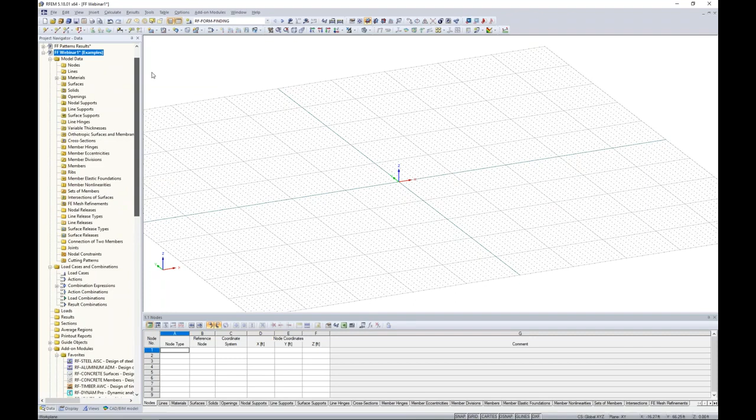Now, our results will also be available to us within the Project Navigator, which we'll get into a little bit later on. The fourth tab down here may be new to some of us. So by enabling that CAD/BIM model option, we now have this fourth tab to import in an IFC or a STEP file. So I can just simply click on one of these buttons and I have available to me my IFC file for my office building.

So with a few steps, we can see here that the IFC file is imported into our main program, RFEM. Now, I want to be clear that these are still just components. They're not actual elements within RFEM, meaning they're not surfaces, members, they're not solids. We would need to convert those to elements in RFEM. So right now, this is just serving architectural purposes.

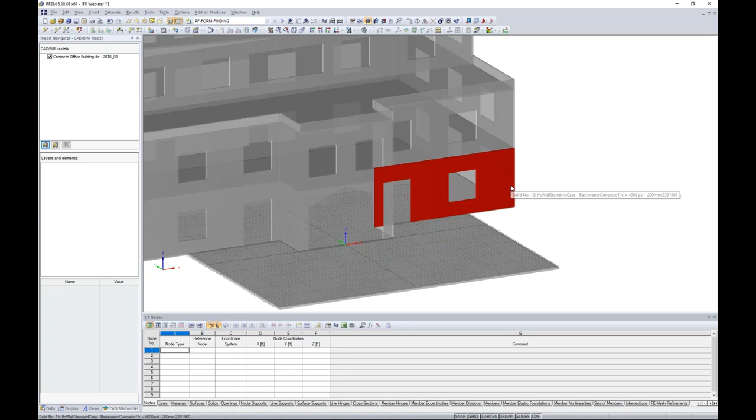And in particular today for this concrete office building, I'm trying to design a canopy on the front face of this building, but I want to make sure that it lines up perfectly with the front face of this office building. So that's the whole purpose of importing in this IFC file. We're not going to be designing the building today.

So what I can do is to take one of these elements, and in particular, we'll start here with our front slab. I can right-click to create a surface. Now, the program generates some arbitrary thickness and selects some material within the model. This really doesn't matter. We're actually going to end up deleting this slab. We're purely using the nodes and lines for geometric purposes to generate our canopy structure. So I can just click OK.

So once I've done this, I can actually hide my IFC file, and all I'm left with is this shell element that I converted from that file into RFEM. So what we'll do here is to turn this into wireframe view with my view options up at the top. And I'll take this line element on the left side of my slab. I'll right-click to divide the line by a certain distance.

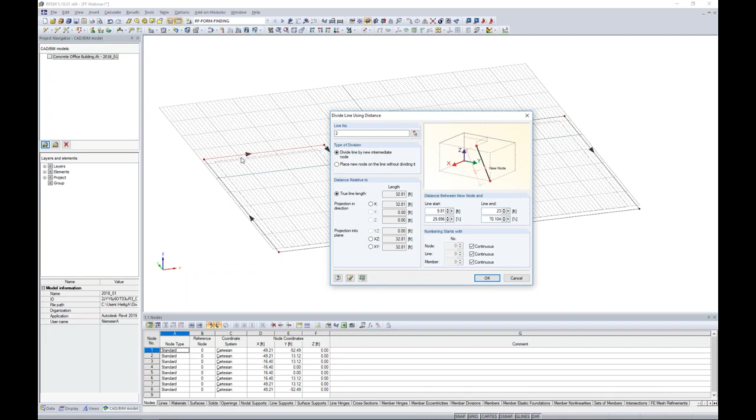So here is where I can select 23 feet from the line end, and I can see with my black arrow here what's the line start and what's the line end. I click OK. So all I've done is generated an additional node here right along this line length.

Now I can hold down my control key to select that new node in addition to this node here. I continue to hold down my control key and I take advantage of what's called our drag and drop. This allows me to make quick copies within the model without using that move/copy tool. I want to additionally use this connect lines or members tool up here at the top. So I select this, and what this allows me to do is to highlight over that node, and it simply broke that line apart in two.

So I take these newly generated nodes, holding down my control key to select them, and now I'm going to use my move/copy tool. I'm going to create one copy in the global Y direction, which I can see with my global coordinates here, of -30 feet, and I click OK. So here are these new nodes generated at a distance of 30 feet in the global Y direction.

Now I need to add in a node right here at my origin. So there's several different ways to do that. Up here in our quick tools, we have the option to draw a new node, which I could just easily snap to the drawing grid here at the origin. We also have this feature that's called node between 2 points. So when I select this option, I can click on the node on the left, the node on the right, and the program automatically suggests that I'd like to place a node right at the midpoint.

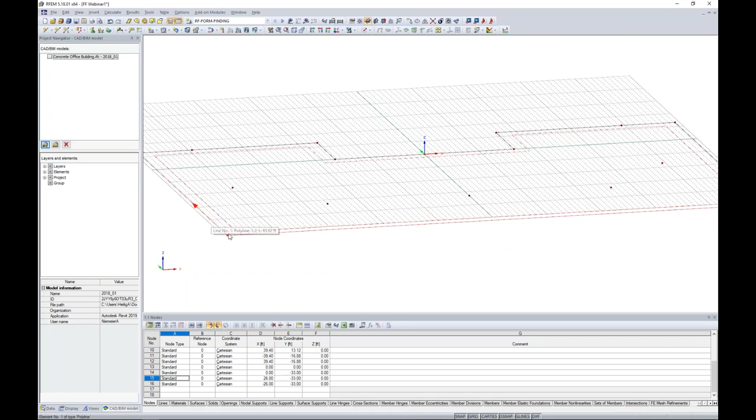Now that we are done with the basic nodes at the bottom of our canopy structure, I'm done with this surface, so I select it and hit delete on my keyboard. We can clean up the model by deleting all of these line elements we don't need, simply clicking on them and hitting delete, and we're left with only our nodes at the bottom here.

The next thing to do is to generate our columns. These won't be columns yet, just lines, placeholders which we'll later assign a cross-section and material to. To do this, I select the nodes I'm interested in, holding down my control key to select various nodes, then use my Move Copy tool.

We create one copy in the global Z direction, the vertical direction, of 23 feet. Before I hit OK, I go into this Edit Expanded Settings, which allows me to create lines between my copied nodes, saving us an extra step rather than drawing those lines manually. Once I click OK, those line elements that will eventually be our columns are drawn here.

Now, in the rear of my canopy, this is where it will be framing directly into the office front face, so I don't need to draw columns back here. Rather, we're going to attach at the top of the canopy directly to the office building. So I highlight these line elements and my bottom node and delete them all together, and I'm just left with these nodes up top.

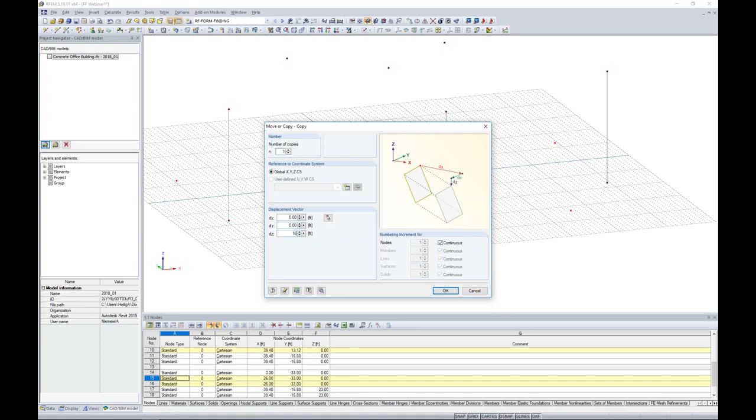Now, in a similar fashion, I want to select the individual nodes left down here at the bottom, use my Move Copy tool once again, this time only a distance of 16 feet. We leave this setting here to create lines between nodes. I click OK, and here are my additional columns.

Again back here, we're framing directly into the office building, so I don't need these columns back here, just these nodal points at the top. Just like that, we have finished with the basic geometry here from that initial slab. So I'm going to turn off my grid down here at the bottom, and I'm only left with these node points, and I'd like to draw the outer profile of my canopy structure.

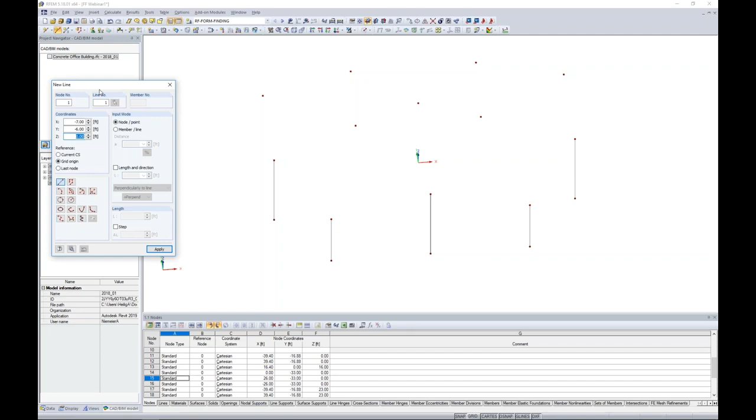I can choose a new line element here in our quick tools. Keep in mind, I still have drawn no members within the program, these are just simple lines and nodes, exactly what you would think of as in AutoCAD, just line elements only. And we choose this straight line option.

Here is where I can snap to these different nodes that I've generated, and the program is fairly good about using the O-snap settings to snap to the top of these nodes. So I continue around drawing the structure as such. We right-click to exit, and we have the outer profile shown.

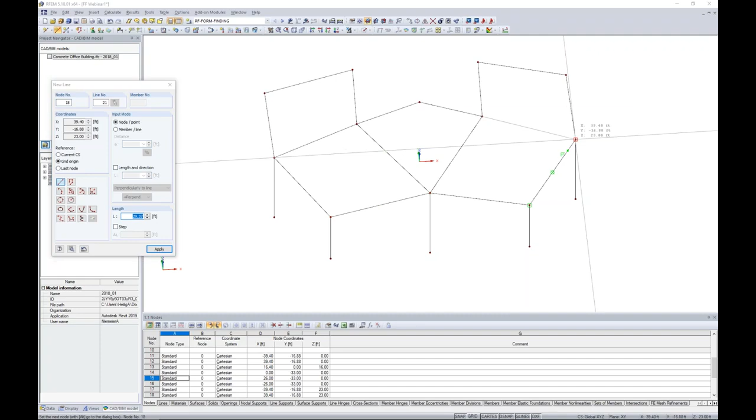Now, I do need to draw lines to define the individual cells here of my canopy, so I continue doing so by just snapping from one node point to another, and we do so on the right side of the structure. Just like that, we are finished.

If we're interested to see how these elements frame into my office building, I can always reactivate this IFC file of my office building. Remember, these are just components used for architectural purposes, so I want to make sure my canopy isn't framing over any windows or doors. So far, it looks okay.

So we turn that IFC file back off, and now we want to begin drawing our cable elements. Our cable elements are going to be placed on the boundary lines of my fabric membrane.

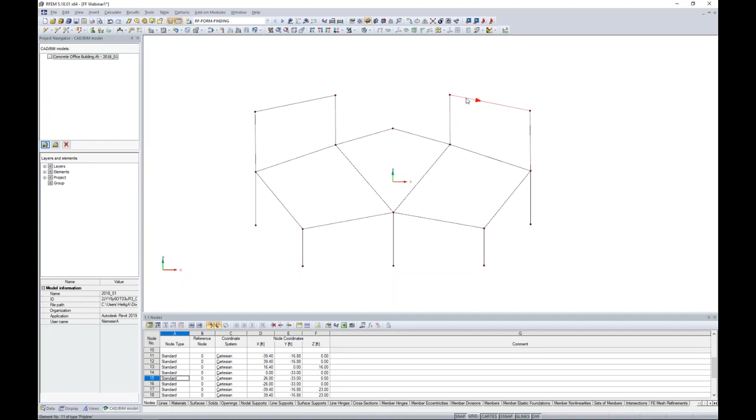This is pretty common within membrane construction. These tensile cables will take the tension forces as the fabric is stressed. So at locations where we're framing directly into the office building, these line elements will be cable elements, and we can assign cross-section properties for the cable elements to these lines directly.

But for the other line elements up at the front of the structure, we have a small issue. These will eventually be HSS steel members, but I also want to show cable elements at this exact same location. The problem is that both the steel member and the cable elements cannot share the same line, so I need to draw a small offset line to represent my cable as an arc member.

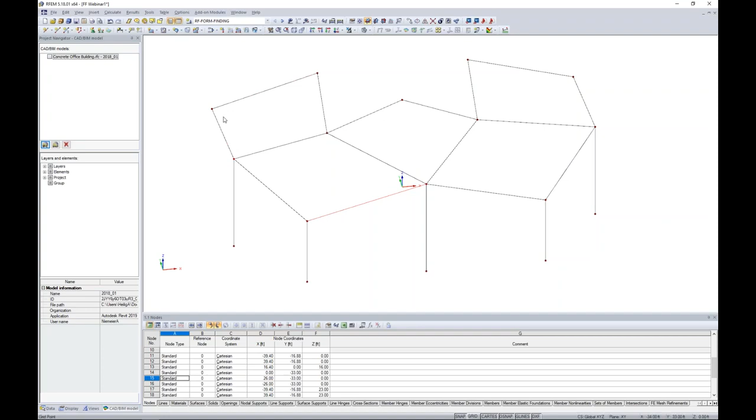How I can do this is to turn back on my grid at the bottom, and we don't want to use these global X, Y, and Z coordinates because we have some pretty odd geometries here. We have a nice feature in the program where we can define our own work plane by clicking on 3 grid points. I click this option once, then click 3 times to define my grid, and you'll notice the drawing grid is automatically placed at the incline specified by those 3 points, with a new coordinate axes of U, V, and W.

With this new coordinate system, I'll draw a new line again, but this time as an arc via 3 nodes. I simply click on the point closest to what will be my office building, then click on the column point, and there we have a simple arc element. Keep in mind the arc radius is completely arbitrary—it doesn't matter what we set this to. The program will later override this shape with the form finding process, based on the pre-stresses we put in, to find the correct catenary shape.

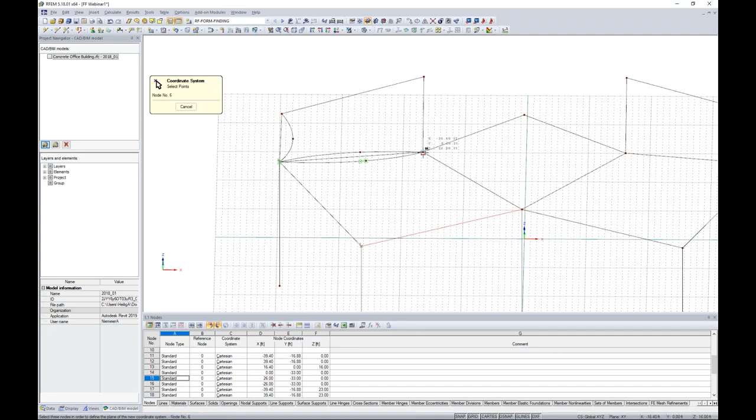I'll do the same thing at a different location for my cell points—again completely arbitrary. We move up to the second cell and change our user-defined drawing grid. I click first to reset the drawing grid, click again to define my new point, and click on 3 points here, and now we have a new drawing grid at a specified angle.

We draw a new arc here and simply snap to these points, again any arbitrary points. We need to do this one more time, so we click the option in the toolbar for a user-defined grid, click 3 new points, and now the specified angle is given. We go back to draw a new line element as an arc with 3 points and continue this process for our additional cable elements, and one more time for our 3rd cell.

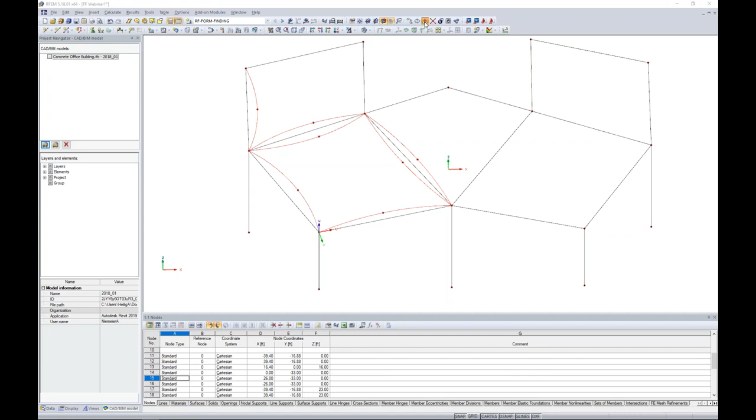Deactivating this grid at the bottom, I have these cable elements shown, and I'd like to show them on the other side. Rather than going through that entire process again with our user-defined grid, we can hold down the control key to select these cable element lines and take advantage of our mirroring tool—exactly like what it sounds like, similar to AutoCAD. We create a copy by mirroring about the global YZ plane, click any point within the model to mirror about, click OK, and we're presented with the cable elements on the other side of the structure. That saves us an immense amount of time.

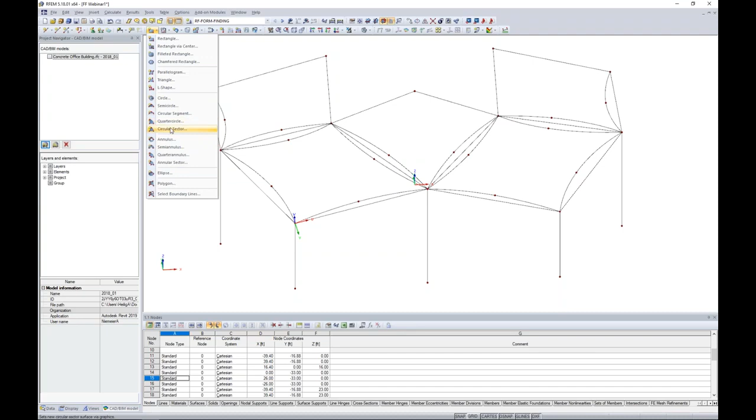Now that we've defined the boundary lines of what will be our fabric membranes, we can move on to drawing those 2D surfaces within the program. For this, I would typically suggest drawing a new surface element for a flat membrane, but you'll see that all surface elements within RFEM are only considered in a single plane. If we look at this very complex geometry, these surfaces are certainly not in one plane.

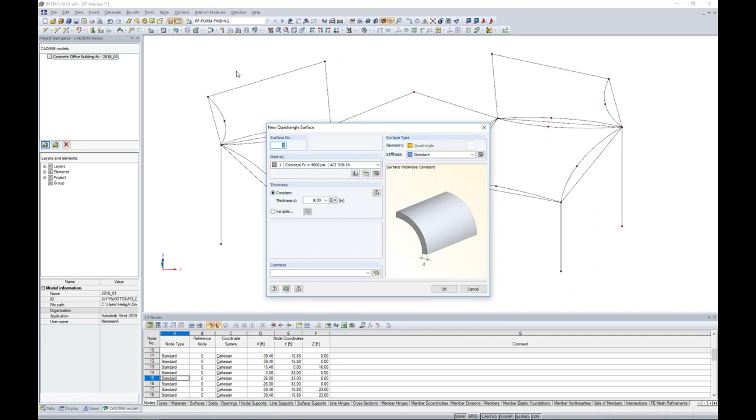So this is where we need to use the option for a quadrangle instead. We can use that from the drop-down list—quadrangle, general 4-sided surface. The stiffness will be set to membrane orthotropic.

The next thing we want to do is define what will be our membrane material. In all cases for these membranes, you're likely going to have to create a new material. We do so by creating a new material, which opens a dialog box, and we can give it a name. We'll call this one membrane.

We can even change the color. For my model, I'll go into the color palette and use green instead of blue for my fabric membranes. We change the material model here to orthotropic elastic 2D.

This information is likely something you'll get from the manufacturer, or from your own testing methods or relevant resources. For our example, we know from our manufacturer that our fabric membrane is stronger in one direction than the other. But I'm going to set this as an isotropic membrane for now, because with these complex shapes and geometry of the canopy, I don't know which way to span the strong axis of the membrane to take the high tension forces.

I'll show you later how we can easily determine that. For right now, we want to set this to an isotropic material, meaning it has the same stiffness, or modulus of elasticity, in both the X and Y directions. Keep in mind we'll come back later to adjust this.

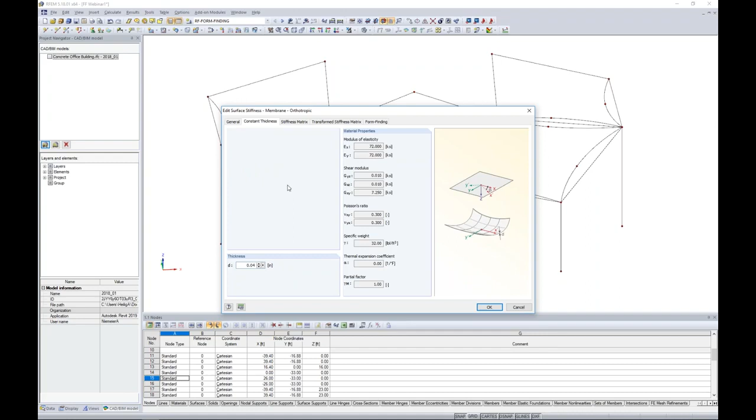What's quite powerful is that we can view the stiffness matrix of our membrane. Based on the material properties we put in, this is exactly the stiffness matrix that will be reflected in the RFEM model.

And finally, our form finding tab. This is available because we've activated the form finding module at the beginning of the presentation. We have two different calculation methods for this, either standard or projection. Standard is pretty typical for fairly flat membranes, and we'll be using that today. Projection would be used for more conical type structures.

With the standard calculation method, we can specify a pre-stress force in both the warp and weft directions. This is in the X and Y directions, and we'll choose 0.5 kips per foot. I click OK, and now we're done defining all the various settings for our membrane.

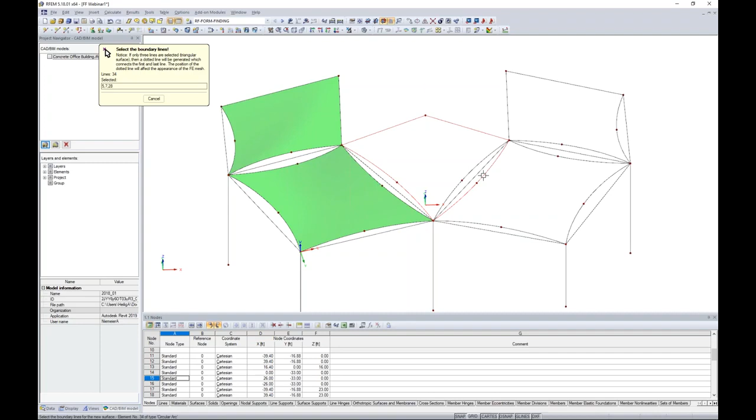We click OK, and the program asks me to define the boundary elements of my fabric membrane. As I begin to click what will eventually be these cable members, you can see that our fabric membrane is created. And lastly, on our last cell on the right, we right-click to exit out of that dialog box.

Again, if we're curious to see how this frames into our concrete building, we can activate that IFC file, and we can see that everything looks great so far. So deactivating that, we want to move on to the cable elements.

Right now, all of these cable elements are just lines. They don't have a cross-section or material defined. So what we can do is hold down our control key, select all of our membranes, and choose visibility by selected objects. When I do this, I can highlight all elements within my model.

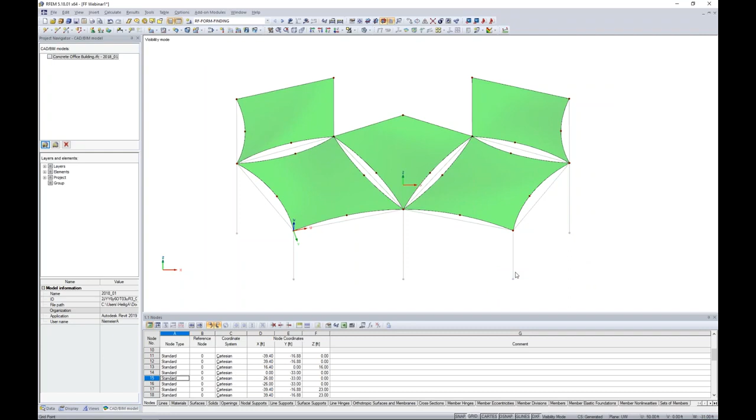You'll notice that down here, my column lines and the other various lines are not available to select. That's because I've deactivated them in my view. I only can select my membranes and their boundary lines.

So I can right-click to edit the lines, and we're brought into our line dialog box. The third tab here is called Member. This is where we can make a member available by selecting this checkbox, and here is where we can set the member type to cable.

The program's telling me I need to create a new cross-section, so I'll access my cross-section database, which you can see here we have all of our various cross-sections available within RFEM. We have several parametric sections, massive sections, thin-walled sections. We have all the rolled sections from the various standards, and in particular today, I'm going to use these solid sections.

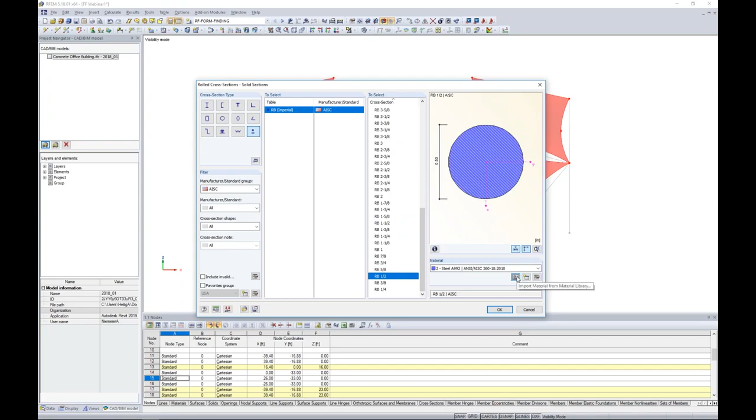So this just has some pre-populated diameters. They're basically just round bars populated from the AISC with set diameters, but you can always create your own with a parametric section. We'll choose a 1/2 inch diameter cable. The material is also set within this same dialog box. So with the cable materials, I'm going to access my material library.

Similar to the cross sections, I want to use my filters over here on the left, and I choose metal, but under my second drop down, we can choose cable. Now, typically when you first populate this, you'll only see a few materials available here from the manufacturer Pfeifer. If by chance you're using this manufacturer, then great. Your materials are already set within our database, but likely you're going to have to add your own from whatever manufacturer you're using of those particular cable elements.

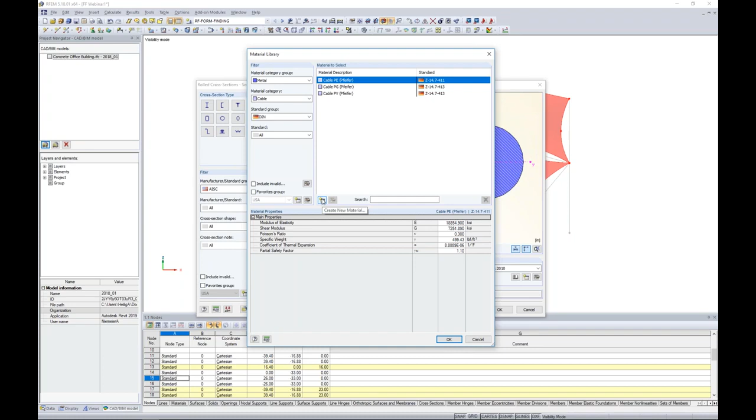So we can do so by adding our own material with this button down here, create new material. So what I went ahead and did is I created a new material, which if I back out of this, we'll be able to see it. And I called this one my ASTM cable material. Then we can put in the material properties, and you can set the applicable filters over on the left where you would like them to be available.

Once you have input these material properties and you've saved this material description, it will always be available for any future RFEM model, so you don't have to define it every time you create a new model. So once we've done this, we'll go ahead and use this ASTM cable material with my material properties shown here. I click OK. And before we click OK out of this dialog box, similar to the membrane elements, we need to set our form finding settings.

So I go ahead and click on this expanded settings dialog box, and this is where we can activate either a target cable length, a cable sag, or maybe we just apply a pre-stress force directly. This is only available with RF-FORM-FINDING activated. Essentially what this allows us to do is to model these cable elements as either straight lines, which you can see back in my RFEM model, or pretty much any arc shape like this. And everything will be overwritten based on these settings here.

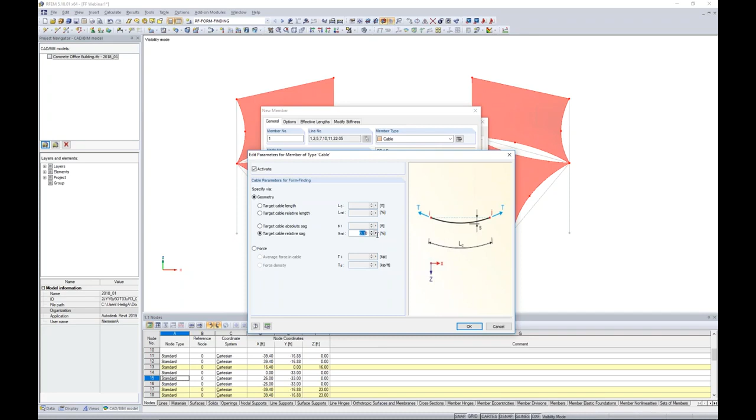So for today, I want to use a target cable sag of 10%. I click OK through all of these dialog boxes. And now, I know it's a little bit difficult to see, but we do have cable elements set for the boundaries of our fabric membranes. So I cancel out of this visibility mode, and we need to continue in this same manner for the additional line elements that are left here.

So we'll start off with our columns. I'm just going to use my selection box here to highlight over the vertical lines only. I can double click, and again, we have a member tab where we can make this member available. Now, of course, we want to change this member type to beam. We certainly don't want cable elements for our columns. We want to choose a new cross-section from our cross-section library.

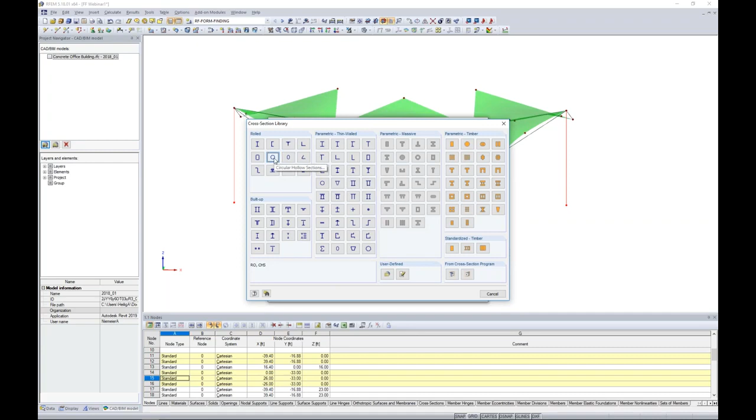And here is where we can access our HSS sections directly from the AISC. Within this drop-down box, you'll also see the various other standards and manufacturers available. In particular, the CSA standard will be available here as well. So we choose the AISC 15, which is the latest version.

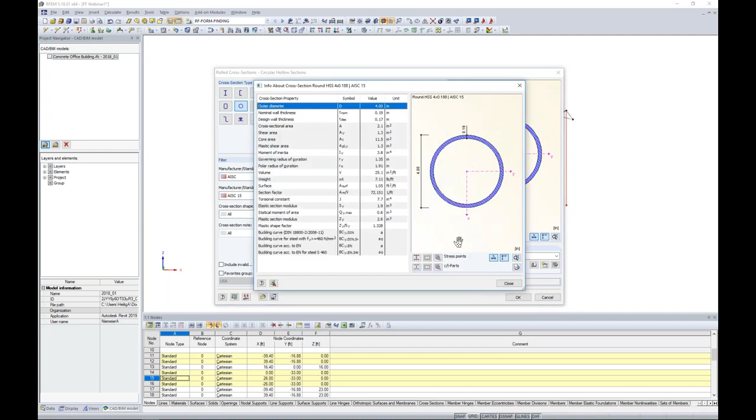Now for my canopy structure, I'm really not trying to detract too much from the aesthetic appeal of this office building. And we know that this canopy isn't going to take a high amount of vertical gravity loads. So what we can do is choose a pretty low profile section here. We'll choose an HSS 4-inch diameter, and we can see the cross-section properties available to us with this info button.

The material is also set within the same dialog box, similar to what we just saw with our cable elements. So we can access our material library, and we use our filters over on the left here to select steel from the ASTM, and here we have available the 2016 version with all of the AISC materials available to us. Again, if you want to create your own material, you can do so with that same button down at the bottom.

For today, we want to choose A500 grade B, and our given material properties are shown here, and I click OK. So once I'm done with these dialog boxes, you can now see these columns have been generated with the applicable material and cross-section shown here in the rendered view. So we need to continue doing so for our remaining line elements here.

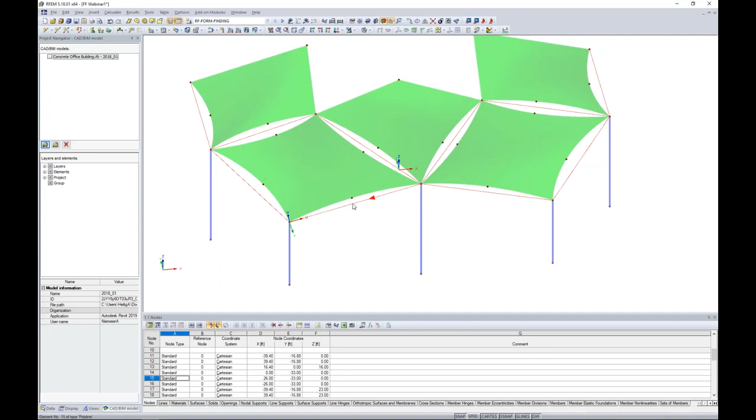These will actually be our compression members, which we also want to set as HSS. And we'll double click on these lines. Again, we're just choosing the member type available here. The member type this time will be set to truss. The only difference between a truss and a beam member is that the program's automatically going to release that moment at the member end. So it's just a quick way to set in the program that we want to transfer only shear and axial forces. You'll notice that my member hinge option is grayed out down here.

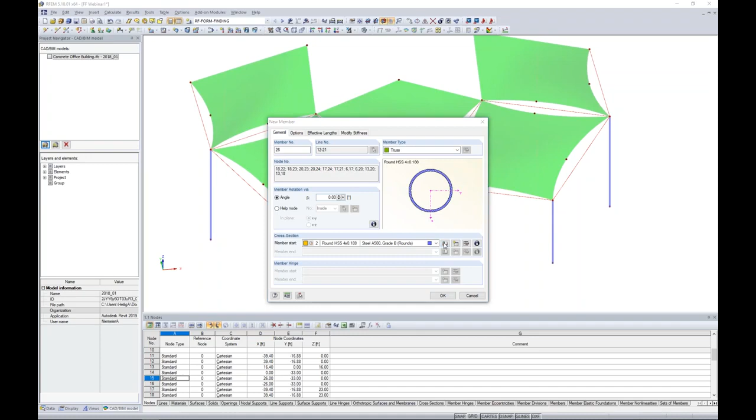We go to our cross-section library once again. We choose our HSS sections, and because these are taking quite a bit higher loads, especially in compression, we need to choose a bigger diameter. And in particular, we'll choose 7.5-inch diameter. I've already defined that steel A500 grade B material, so I don't need to define it again unless I want a different material category, but it's available to me here within my drop-down box. So I click OK. I click OK once again, and now you can see those HSS members available for our structure.

So before we can run the form finding procedure, we obviously need to support this structure. So what we can do is to select a new nodal support up here in our toolbar. I choose a new nodal support, and we have a few default options shown. I will use the first default option, but to explain what's going on with these nodal supports, we have our 3 degrees in translation and our 3 degrees in rotation. So for the bottom of my columns, I'm going to restrain translation. I also want to restrain rotation about the global Z direction. This is purely torsion for that column, so it's not free to rotate about its own axis.

We also have the partial fixity here for spring supports, and the nonlinearities are important, especially for today's presentation, because we have an option here called the form finding stage only. If by chance you want to apply a nodal or line support during the form finding process when we're applying these pre-stress forces to both our membrane and cable elements, and you only want that support to be applied during that particular stage only, we can select this form finding stage only. You'll notice the nodal support changes to blue to indicate there is a nonlinearity.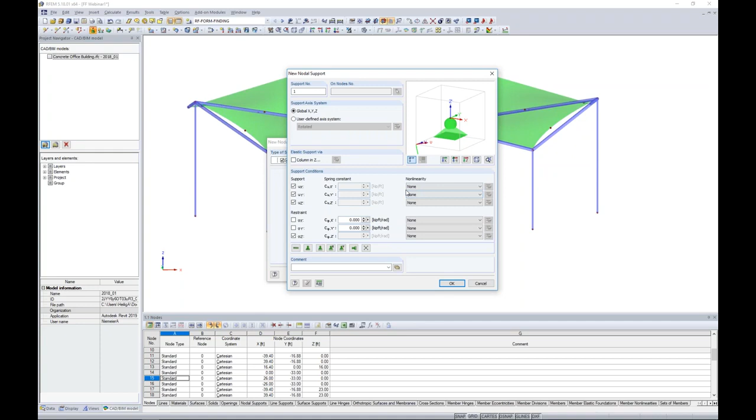So what will happen here is it will only be applied for RF form finding to find the initial pre-stress shape. Then for all other subsequent static loading, such as live load, dead load, snow load, and so on, the support will not be considered at all. So extremely helpful for when we're trying to find stability during that form finding process, but you do in fact want to make sure that this would truly be available out in the field when you are pre-stressing these membranes. You don't want to use them in the model if you're truly not using them out in the field. So for today, we're just going to use that first hinged option for our support with no nonlinearities applied, and we apply them to the bottom of our columns.

Now, for the locations framing into the office building directly, we also want a pin support, which I can access with my nodal support once again. I'm going to create my own definition here because I want to release the moment in the Z direction as well. So I only have a typical pin with translation restraint in the X, Y, and Z. I've now defined that particular support type, so I can click directly on my nodes where they will be framing into the office building. And just like that, we are done with our geometry. So back under the data tab, as I mentioned, all of our input data has been applied here, so we can easily make changes to all of these cross sections as well as materials.

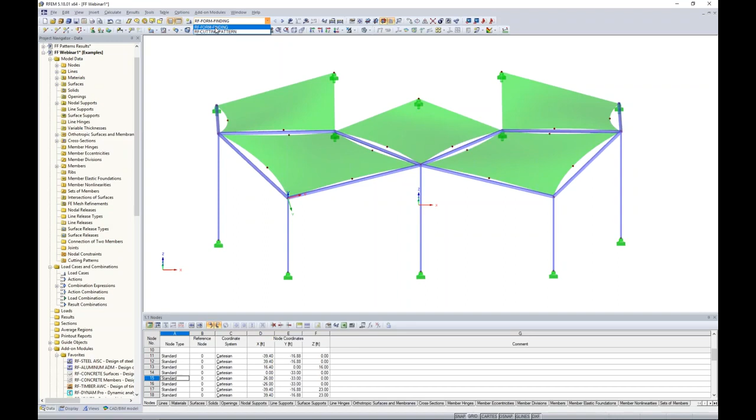The next thing to do is to run the form finding process. So I have applied no loads to my structure yet. I've only applied those pre-stress forces. In my drop-down box here, we see RF form finding available to us, and we can easily run a quick analysis for this. So all I'm doing is applying those pre-stress forces to both the membrane elements and the cable elements to find the true deflected shape here after those pre-stress forces have been applied.

So what I'm presented with are my results within my project navigator. So we can see that tab available to us here. What's probably most interesting is the initial deflected shape. I think that this is very telling for us to know if we've defined everything correctly.

If you're seeing a deflected shape that makes absolutely no sense to you at all, then you probably have modeled something incorrectly. Perhaps we're missing those cable boundary elements to take those high tensile loads. Maybe you're running the wrong calculation method with the form finding procedure. So you definitely want to take a look at the deflected shape here.

So what the program has done is it has created a new deformed mesh based on my settings here that we can now move forward with. But before I do so with the additional loading, I want to point out some very powerful features in our results that are given to us after running RF-FORM-FINDING.

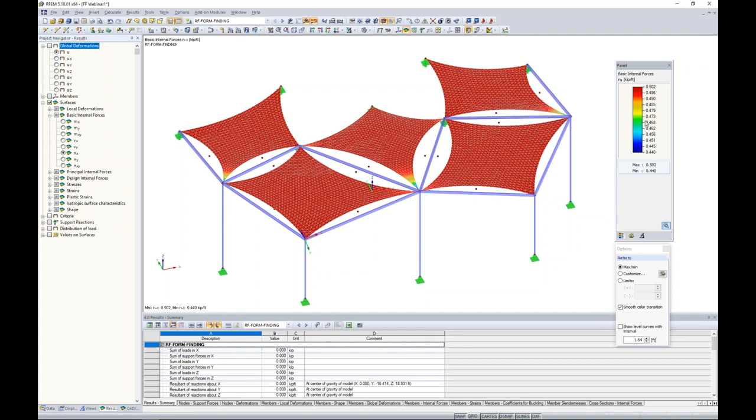So the first would be to take a look, of course, at our global deformations, but we can also look at our surfaces, and in particular, the NX and NY forces. So these are the tensile forces that have been applied to our structure. And remember, I set this at 0.5 kips per foot, and that's reflected here almost identically within my basic internal forces, NX and NY. So that's a really good sign that the pre-stress forces are available to me with these axial forces for my membranes.

The other interesting thing that we have within our results is under this shape tree. We can view the different contour lines. So the contour lines are going to show us from the origin point of 0 exactly what elevation we're sitting at here in terms of inches. So obviously the points that are sitting up at these higher columns are going to have a higher contour line than the membranes that are sitting at these lower columns.

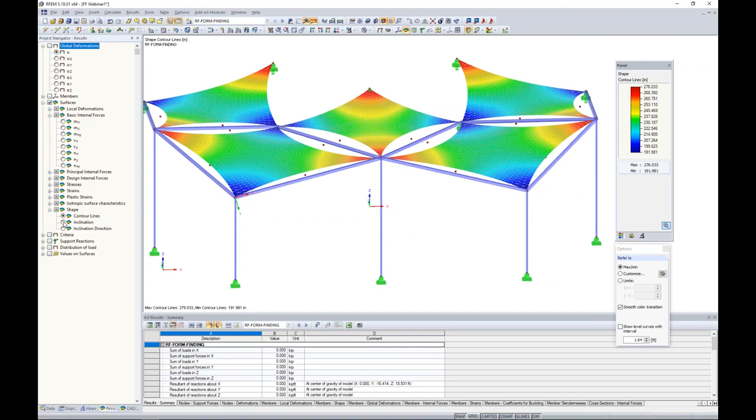We can also view the inclination. So this makes perfect sense that if we look at this location here with red, we have a pretty steep incline where this fabric membrane is framing into that support. But at these locations at the center of the membrane, we have almost no inclination of 0. That's where the fabric remains fairly flat. We can also view the inclination direction here just to give us a sense of exactly how this fabric is pre-stressed during that form finding procedure.

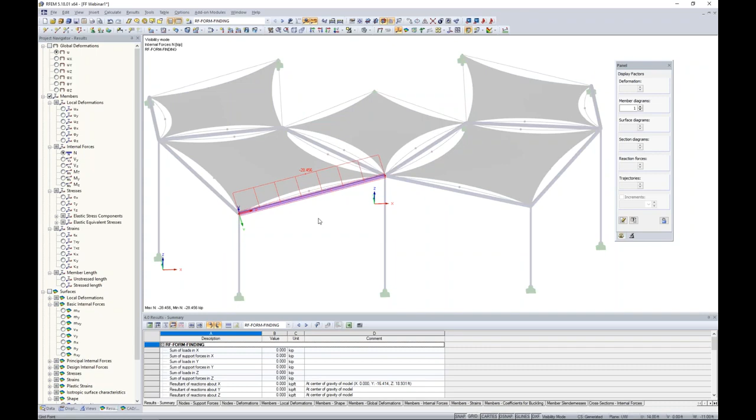So in addition to my surfaces, I also have the internal forces available to me for my members. So perhaps I'm interested in viewing the axial forces within some of these HSS members. So I can take any one of these members and maybe I create a user-defined visibility here. I'm only looking at this single HSS member and I can view those compression forces based on the pre-stresses that were applied to the membranes.

Now I can always right-click to view the results diagram. What's nice about this is I can view in a little bit more detail exactly what's going on along the member length here. In a similar sense, if I cancel out this visibility and I'd like to take a look at only my cable elements, well, under the Views tab within our Project Navigator, we actually can select our members by type and choose the cable elements only. So now I'm only viewing the results for my cable elements.

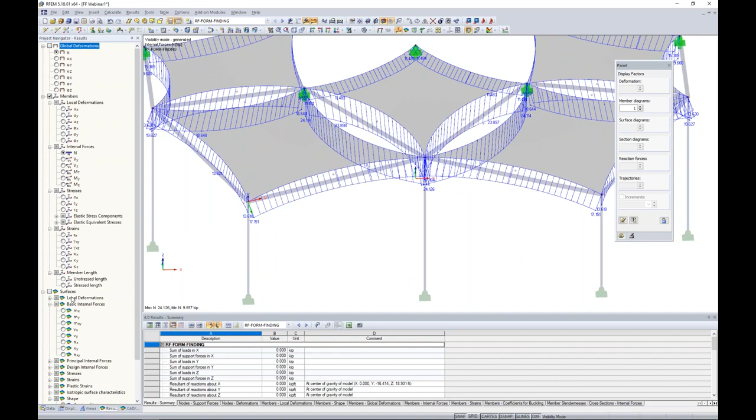I go back to my Results tab and I can view the axial tension forces within these cables. In addition, we have a couple options available here under member length. We can view the stressed length of these cables as a member diagram in terms of feet. So this is the length after we've applied that pre-stress force. We also give to you the unstressed length.

I think that this is really important because this is information we want to give to our manufacturer to ensure that they manufacture these cables at the correct length, which would probably be this unstressed length, so that by the time we get out in the field and we apply these pre-stresses, then we should achieve this stressed length here. So both are given to us.

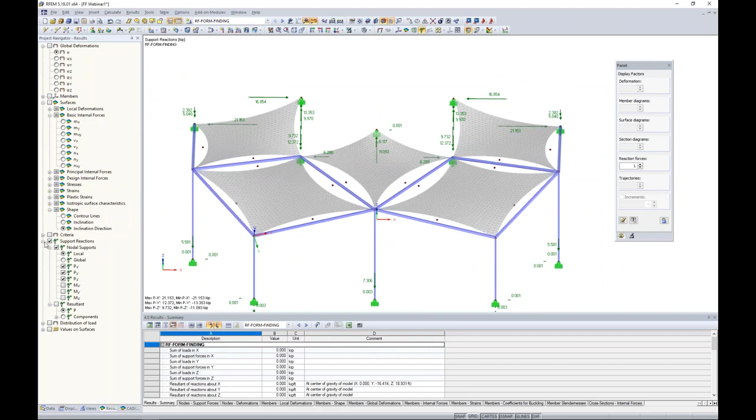Now, additionally, if I take a look at the full model view here, we also can view the support reactions. This might be important here for designing the connections that are framing into our office building. All of that information is available for the form finding process only so far. So of course, much else to cover, but we'll go ahead and move on with our structure. So I have only applied those pre-stress forces.

I've applied no additional loads to my structure, such as live load, snow load, and so on. So we want to go ahead and do that now. I'm going to create a new load case up here in my toolbar, and up pops my edit load cases and combinations. So my first load case description will be self-weight. What I'm going to do here is I'm not going to put self-weight under dead, but I'm actually going to put it under form finding.

So what exactly am I doing here? Well, that form finding process that I just showed you did not include self-weight. So just keep that in mind. Now, in reality, when we go out to the field and we pre-stress these elements, it's inevitable that self-weight will, of course, be included. So likely you're going to want to come in here, create a load case under the form finding category with the self-weight active in the negative Z direction here to account for that during that RF form finding process. We didn't do that, but now we can account for that with this load case.

Now, any other loads that are available, again, pneumatic structures, we'd want to put them under this form finding case. Now, it's important to understand that for any additional load cases, and you can see here the program's telling me I have to clear my results because the previous results are no longer valid, we don't want to add any additional self-weight to any of my other load cases. We've already accounted for that in that initial self-weight load case here during form finding.

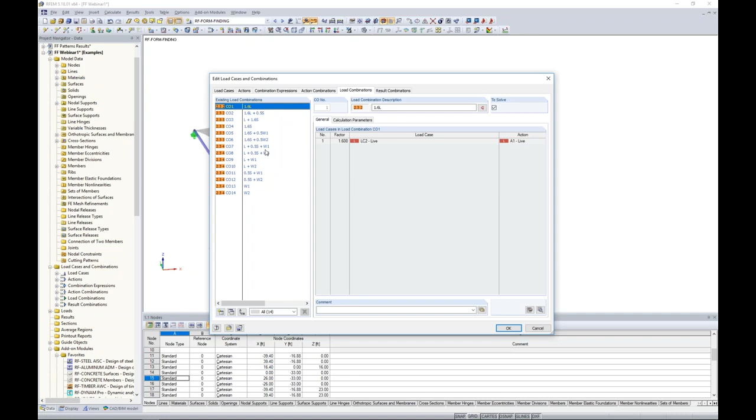My load combinations tab will then simply list out all of my LRFD load combinations here based on the standard. My result combination is just simply an envelope solution for both my max and mins that will eventually be presented to us within our results for all of the LRFD load combinations. So what I've done now is I've set up those load cases and combinations, which should be available to us in our drop-down box here. But now I actually need to apply those loads to my structure. So my self-weight load case, we don't need to do anything.

Everything's done automatically there. My live load case, well, according to the ASCE 7-2016, and in particular Table 4.3-1, this addresses awnings and canopies for fabric construction. And what this requires is a minimum live load of 5 PSF. So if we adhere to that, we want to apply a new surface load, which we can do so in our quick tools up at the top. The load direction will be set in the global Z direction with a magnitude of negative 0.005 kips per square feet. I click OK, and then I just simply highlight over all of my membrane surfaces.

In a similar fashion, we want to apply snow load. So what I'm going to do here is go back to a new surface load. You'll notice I have snow load selected in my drop-down box here. And now my load direction is going to be in the global Z projected area.

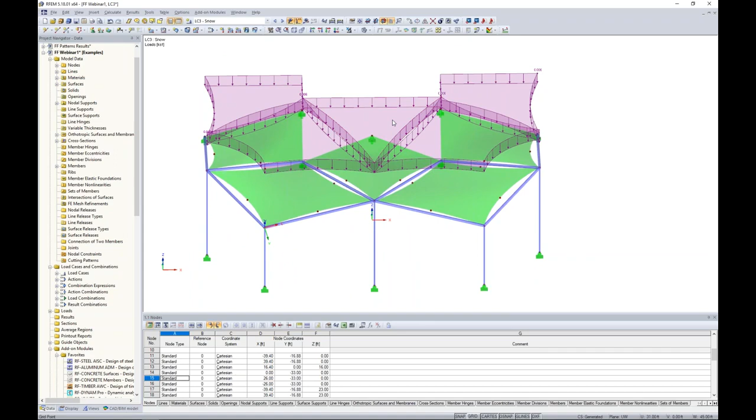So areas where we have high inclinations, that's where we're probably going to see the snow slide off essentially. The program will account for those angles, but at these areas where our membranes are relatively flat, we're going to see higher snow loads there. So that's the advantage of a projected load.

When it comes to our wind loads, according to the ASCE 7, Table 30.11-1, this does address wind loads on attached canopies. So for time's sake, we don't have time to get into this today, but I just want to briefly mention that. For these specialty type structures, I want to mention something back in my PowerPoint we are currently working on in development. And this is going to be a standalone program called RFLOW.

Well, what RFLOW will eventually allow us to do is to simulate wind flow around structures. So what this will help us do is to understand wind effects on specialty structures where there's really no clear approach within the various standards. So it could be argued that our particular canopy today is a pretty complex geometry. You know, it's framing into this office building. How exactly do these wind loads affect these specialty structures like this?

So this will be a huge advantage once eventually we do release that. It's not quite ready, and we do plan to integrate it with the RFEM model. So you'll be able to bring in the geometry into RFLOW, apply these wind loads, and in turn we'll be able to export those wind loads back into the RFEM model to be considered in the analysis. So I did want to mention that, something exciting to look forward to, but for now we have to jump back to RFEM and manually apply these loads.

So for our simple load cases today, we will apply a new surface load here in the projected X direction. So I only want the surfaces that have actual face value according to the global X-axis to be affected by these wind loads, and we give it a magnitude of 0.15 kips per square foot, and I can highlight over my particular membranes here.

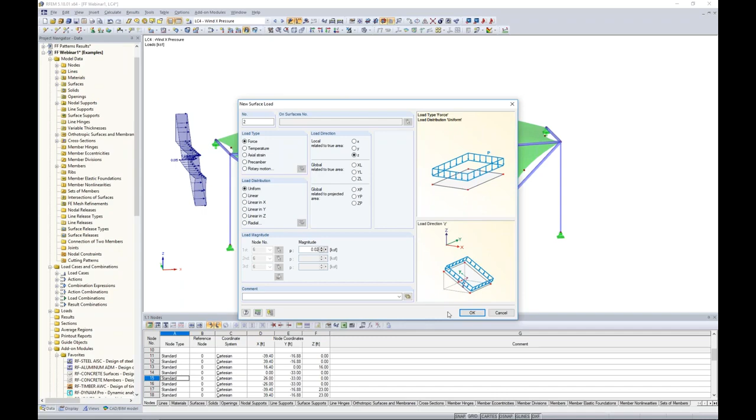Now for the downward pressure, we go to a new surface load, and we want to apply this according to the local z-axes of my membrane. And I'll show you in just a minute how we can view those local axes, but just trust me that the z-axis is how we want to apply those to our structure, and we will give it a magnitude of 0.02. So this is going to be based on the local axes of the member, so now we can see those loads applied no matter what the geometry is normal to the surface.

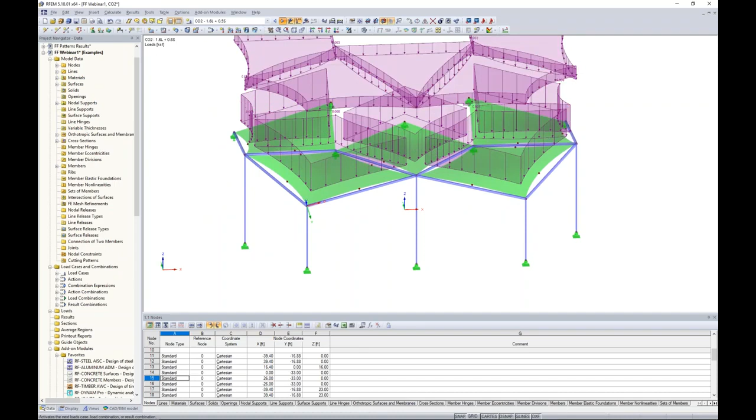For our wind in the X uplift direction, exact same scenario here. We just simply want to change the magnitude direction and put a negative here for our uplift pressure, highlight over our members, and now you can see that uplift pressure normal to all of those surfaces. We also want to apply that small lateral load in the X projected direction. This time we'll give it a slightly higher magnitude than the previous load case, and we highlight over all of our members. So then we can just scroll through here to take a look at all of the different loads applied to our structure based on wind, live, snow, and of course self-weight is in there too.

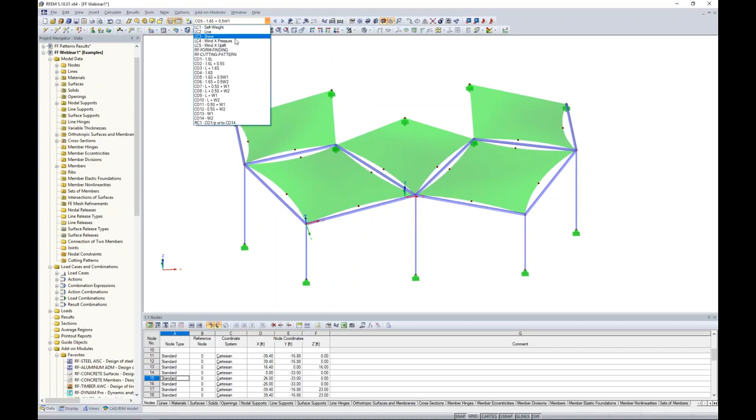Before we're ready to run an analysis, you'll remember several minutes ago that I explained that we're setting this to an isotropic material. In reality, we have an orthotropic material. I need to determine which way to orient these membranes in order to take the highest tensile forces. So how exactly do I consider that? Well, what I want to do here is to jump to only my live load case, and I'm going to go ahead and apply the live load case only to the structure.

Now remember, we lost our form finding results previously because I said, well, I want to include self-weight now. So we're now including self-weight. The program needs to run back through that form finding procedure. Then we're applying the downward load for live load. Now, eventually the program is going to cycle through. You can see the iterations here for max displacement for the different iterations applied, and eventually we'll be presented with our results. So again, we're using just this single load case here to determine where these high tensile forces will be acting on our structure.

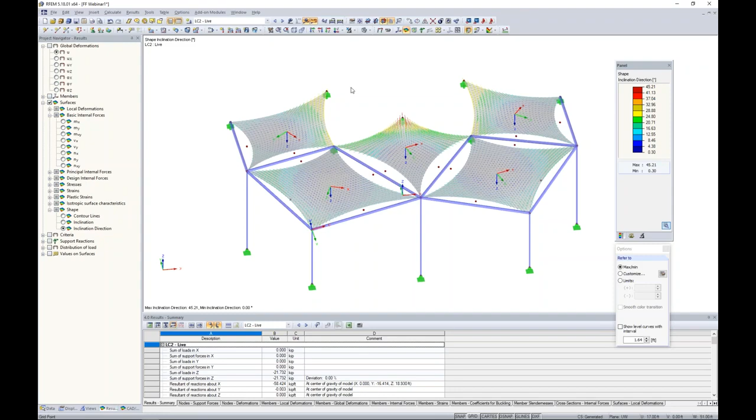So now we're presented with our results here. This is similar to what we've seen before, but now we have this live load acting down on the structure. I'll right-click on these surfaces to view my local axes, so there's my X, Y, and Z axes. Now, if I take this into an elevation view, I want to choose the option surfaces from my results.

In particular, Alpha N, which we've already been in before. Alpha N shows me my trajectories for my load distribution, in particular for N1 and N2. So this shows me where my high tensile forces are within the member, and we can use it in addition to this colored profile panel here.

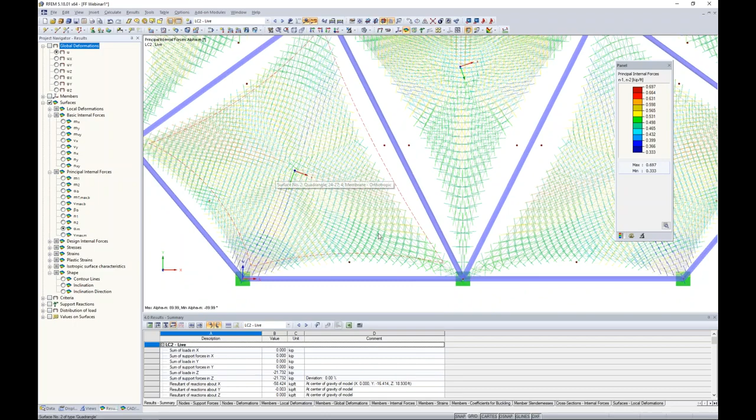If I take a look and compare, I know it's a little difficult for you guys to see, but I can see that my high tensile forces are spanning closer to the office building support down to where this column is for my first membrane. If we look at the second membrane, the higher tensile forces span in the opposite direction, from our upper left column down to our lower right, and so on.

So how do we orient the local axes of these members to make sure they're taking the high tensile forces? I'm going to turn back on my grid at the bottom, and uncheck the option for user-defined grid, and change this in the XY plane. Now we're just looking at that drawing grid at the bottom of our structure.

We probably want to take a screenshot here, or just approximately remember which way these high tensile forces are spanning, because once we draw a new line element, which is what I'm about to do, the program will suggest that I clear my results in order to change any geometry within the model. That's not a problem.

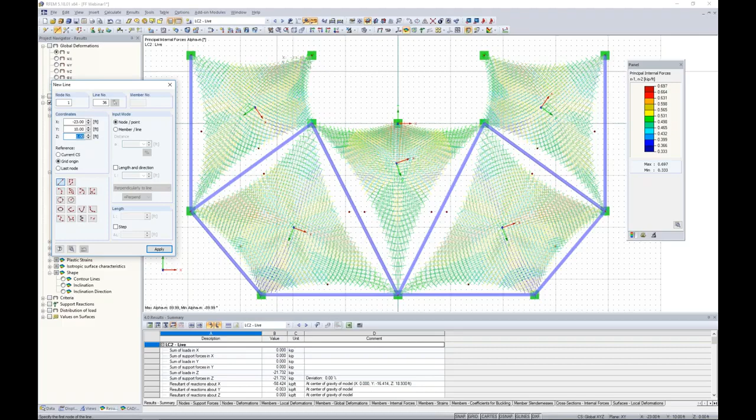I'll go ahead and create my first line element spanning in those high force areas. I clear my results, that's fine. We right-click and do the same thing for our second membrane, and finally our third membrane. I'm going to take these two line elements on the left side and mirror them about my YZ plane. I click OK, and now I have those line elements shown on the other side.

So you might be thinking, what are these lines going to help us with down here? If I go back to the elevation view and double-click on my first surface, I have an axes tab. This axes tab allows me to line up the local x-axis parallel to any line I choose within the model, and I choose that line element I just generated. I click OK, and now you can see the local x-axis lines up perfectly with that line. We haven't really affected our model otherwise with these line elements at the bottom of the structure.

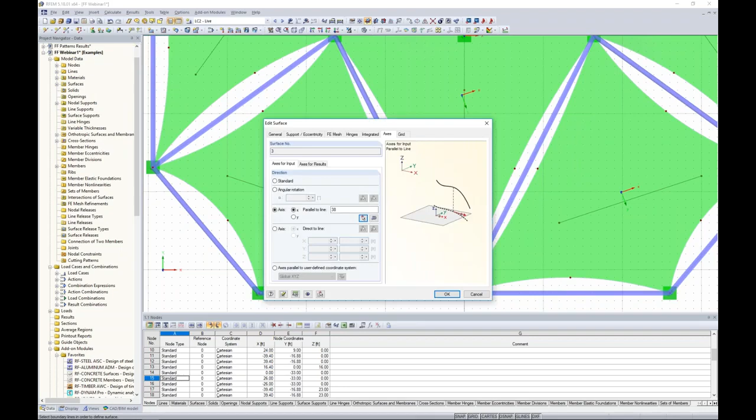I do the exact same thing for my second axis. I choose the axes tab, select my x-axis parallel to my line here, and you can see it's fairly close already, and it lines up to my second line. Same option for my third membrane, I choose the local x-axis parallel to line number 38. We continue doing so around the remaining structure.

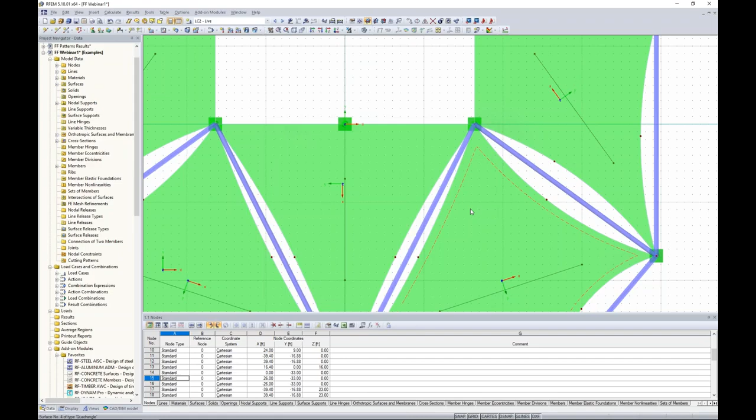What's nice is that the program automatically populates that tab I was just in, so I don't have to fumble through trying to find the same axes tab each time. Lastly, we choose our last fabric membrane and line the local x-axis to line number 39. I click OK, and now you can see the local axes are all lined up to take those high tensile loads.

The final thing we need to do before running our analysis is remember my materials, which I can access from my project navigator. I can either select it graphically, or an easy way is to highlight it here in the project navigator, and the membranes that utilize that material are highlighted. I double-click on it, go back into my material model settings, and this is where I change the stiffness in the weaker direction of my membrane, EY, to 44 KSI, and click OK.

So this is just an easy way to determine exactly which way your fabric membrane should span in order to take those higher forces.

So once we have done that, we're now ready to run our analysis for all these load cases and combinations. Now it does take just a minute, so for the sake of time, I went ahead and have run all those load cases and combinations, and we should be presented our results available to us here within the project navigator.

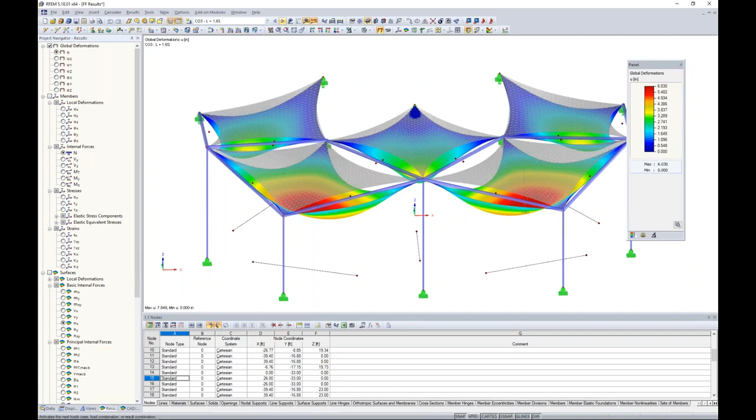I can scroll through the different load cases and combinations, and in particular I'm looking at the deflection. What might be interesting are these uplift load cases where we have that wind pressure applied. So of course all of those same results that I just showed you are available here within the project navigator, which we don't need to necessarily go through all of those again.

What I do want to briefly touch on is design of the supporting structure. Or actually, let me back up one more time. I want to also explain, though, that when we are designing these fabric membranes, we want to take a look lightly at NX and NY.

Now, probably from the manufacturer, we're given some strength for this material. We want to make sure that we're designing with a specific safety factor in mind. Now, this is usually around 5 or so of the material strength, so you can compare that to these basic internal forces. Now, this all depends on which project you're designing for, maybe which state, which standard, and so on. So that's really up to you as the engineer to determine, but that's likely the information you're interested in for the fabric membranes.

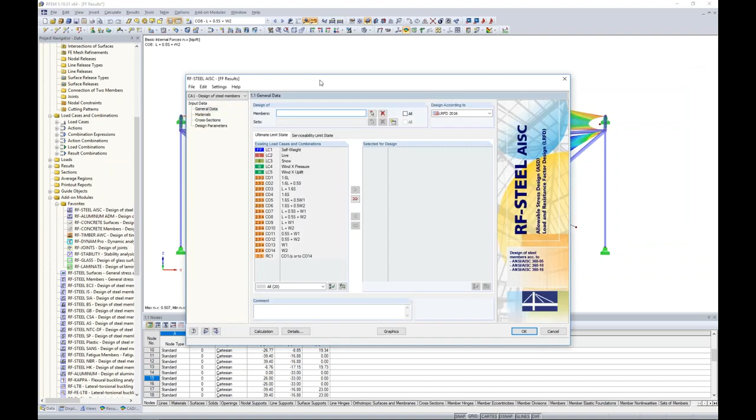Now, as far as our steel members, this is where I want to launch our add-on module RF Steel AISC. Now, we also have RF Steel CSA for Canadian steel design. And this module is a little bit different than, of course, what we saw with form finding, which was embedded directly within RFEM. This brings up a dialog box here. And all of my information is brought into this add-on module. I'm just defining a little bit more information that's specific to the AISC standard for the design.

Now, I want to explain that I'm really going to breeze through this quickly. I've done previous webinars devoted entirely to steel design that I'd like to refer you to on our YouTube channel if you are interested for more information on this. The whole purpose is just to explain that you can do the entire structure design all within one program.

So for this, we want to select our members to design. And an easy way to do this is to jump to my Views tab within my Project Navigator, and I can select my members by material. And I'll choose my Steel A500, which includes all my HSS members, and I can graphically select them here.

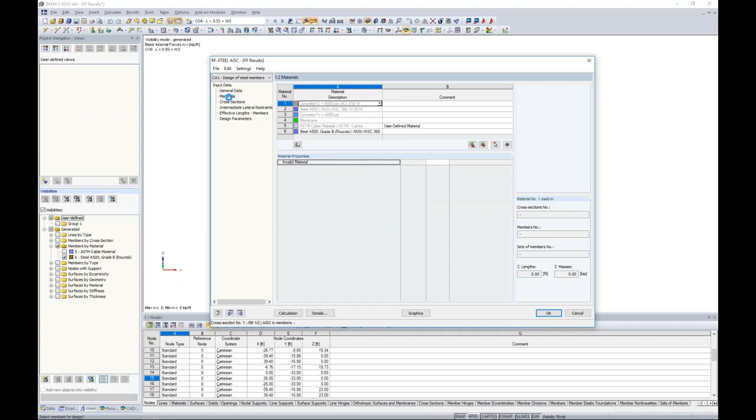I can choose my LRFD load combinations to design per the ultimate limit state, and I'm designing per the AISC 2016 LRFD. Now you can see that the materials are populated here. Steel A500s brought in. My cross sections are all brought in from my main model. The effective lengths, for example, would be my unbraced length for buckling about the strong and weak axis, flexural torsional buckling, lateral torsional buckling, and so on.

So what we can do is run a calculation here. Now, all those internal forces for my members from all the different load combinations are quickly brought in. You can see how quick that solves. The AISC equations are applied to each member, and we can view our results in table format.

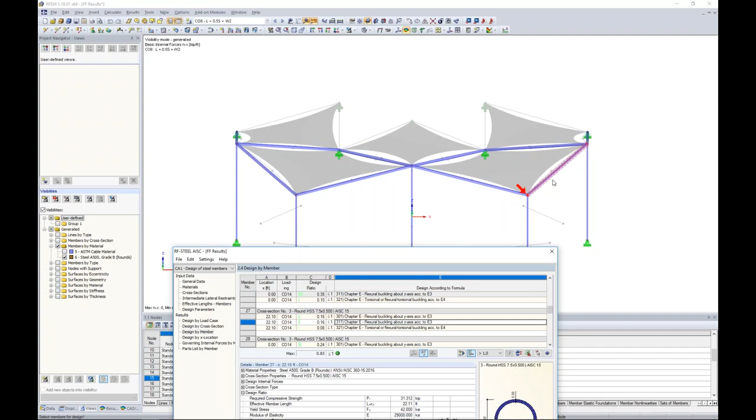So when we view the design by member, we can scroll through all of these different tables here to see how exactly the AISC has played out for these particular members. You'll notice everything is highlighted for these tables and synced up within the RFEM background. We're getting a design here for our HSS members of 0.83, which I would say is pretty great for design purposes.

We can view this information graphically back in RFEM, so we're technically still within this steel AISC module, but we're viewing our results graphically here back in RFEM. So again, I know it's a really quick explanation, but again, refer to those previous webinars that I have created.

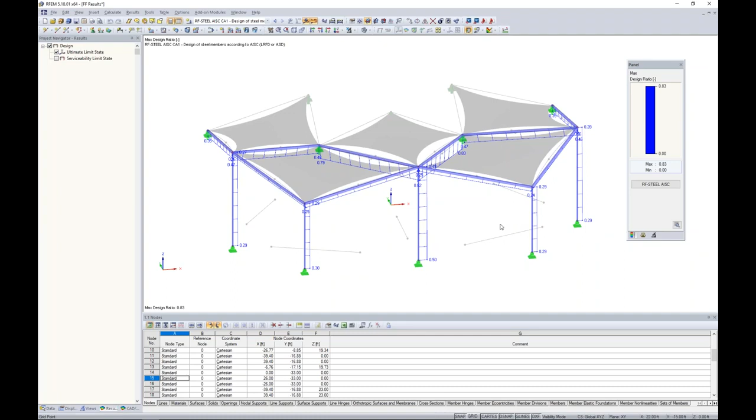Okay, so the next thing that we want to do is to quickly generate our cutting patterns. And for this, what I'm going to do is to go back here to my PowerPoint to explain a few features of the add-on module RF Cutting Pattern. So what this allows us to do is to generate small planar cutting patterns in a 2D environment where we will eventually be using them to create a double curved membrane in a 3D environment with those pre-stress forces applied.

An easy example of this, and of course this reflects our model today, is that if our end structure is to look like this, we obviously need to give some information to the manufacturer creating these fabric membranes in a 2D environment so that when we're out in the field, these will fit together nicely. So it's actually a very complex behavior to generate these 2D cutting patterns.

Rfem in particular uses the minimum energy method, so this is a very accurate analysis. This is in comparison to a lot of other cutting pattern programs that are out there, which typically use some type of geometric flattening method. The minimum energy method is much more accurate and efficient for complex geometries.

What the program will do is press the mesh geometry of the curved surfaces into a plane using a press with frictionless press areas. This eventually results in our tension and compression stresses from this flattening process being in complete equilibrium. So that's the huge advantage of utilizing this minimum energy method.

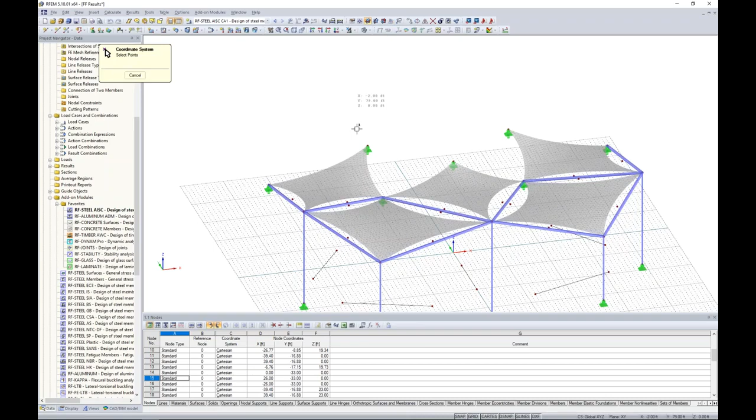I'm going to exit out of the results view here and create a new user-defined grid. This is exactly what we saw before. I'll select this option and click on 3 different points, and you can see the program automatically places that grid right through the center of that membrane. To begin generating my cutting patterns, I right-click on a line and choose New Line, Cut via Section.

Here I can select only my first surface. I click OK, then choose my first point of my cut, which will select at this point closest to our office building, and my second point will be where it frames into this lower column. The cut type will be geodesic with a definition of a direction vector here in the 0-0-1 orientation. When I click OK, the program automatically creates this line element right through the membrane element with the form finding shape considered.

So what I need to do is, this is still too large of cutting patterns. I still need to continue drawing these geodesic lines further on this particular surface. So I take this line element and now use my Move Copy tool.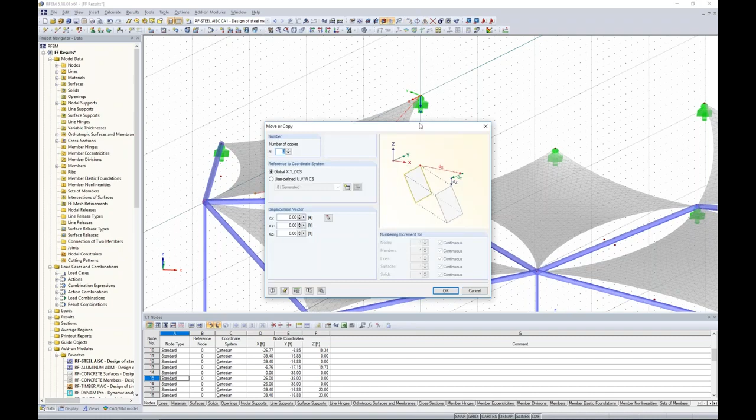Instead of using the global X, Y, and Z axes, I'm going to use that user-defined axes I just created in the UVW direction. We're going to create 2 copies in the V direction of 6 feet, and I click OK. Now you can see the program has generated a couple other line elements here. We use the Move Copy tool once again in the V direction, only 1 copy with a spacing of -6 feet, and click OK.

What we want to continue doing is placing these geodesic lines onto each membrane. For the sake of time, since we're already running out of time, I have done that already with an already saved model. So we continue placing those geodesic lines, and once complete, we simply go up to Tools, Generate Cutting Patterns from Cells. It's as easy as that.

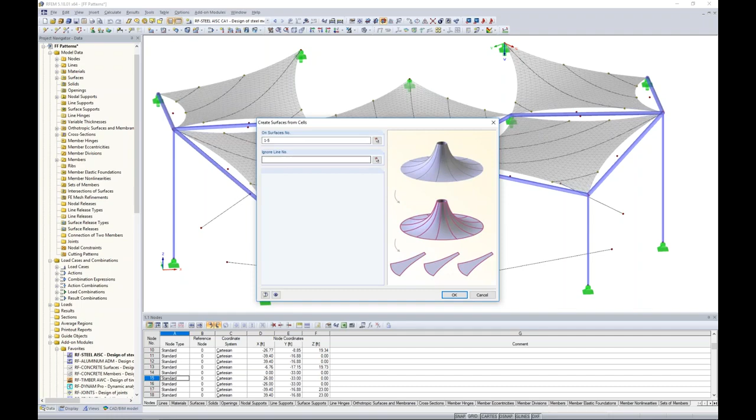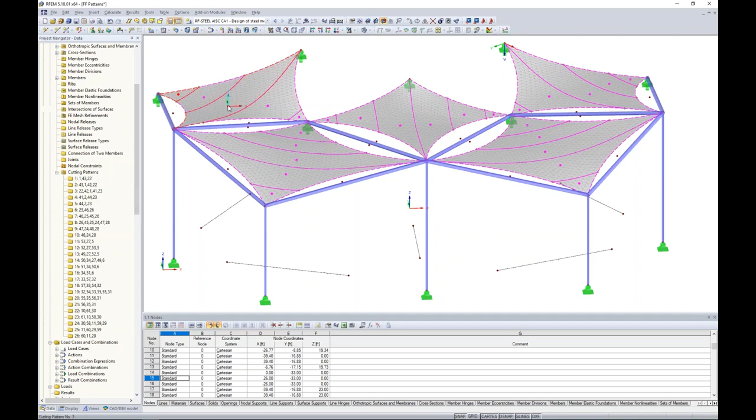Now the program asks us which surfaces. We're going to select surfaces 1 through 5, which is automatically populated, and the program automatically detects these different cells to generate these cutting patterns. So what I'd like to point out is that our cutting patterns are now available to us in our project navigator, and you can see they're synced up in the graphical view as I go ahead and choose the different ones in my project navigator. We can double click on any one of these cutting patterns.

And this is where I want to point out that we can go ahead and add in here what's called compensation, which we already covered, in which case we now have a compensation tab that we can add in a percentage in the warp and weft directions. We also can account for those allowances.

So under the allowances tab, this is that additional fabric. And in our case today, we want to add in some additional fabric for those welding seam lines of 0.16 feet. The border lines, let's say we want to add in 0.33 feet. So that's going to be applied to this particular cutting pattern.

Now, if you don't want to apply it uniformly to all of the line elements for that pattern, you can choose the option here to define different lengths as well for each border line. So once I've done that, and by the way, you can select multiple cutting patterns here and apply the same allowances to multiple patterns at once rather than individually selecting them.

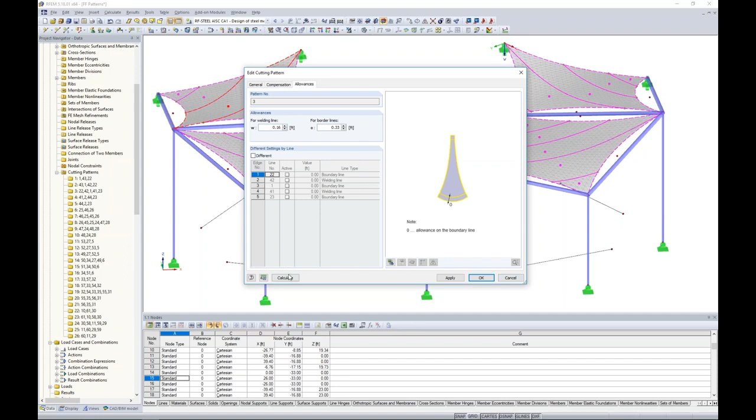So I would click calculate, and this takes, once again, just a minute to run. So we'll jump to an already saved model. And here we are once we generate those cutting patterns with our results available to us. So we can use our drop-down box to choose RF cutting pattern here.

And what you'll first notice is that for each cutting pattern, what would initially be presented to us here is our table format. So you can see that as I begin to scroll down through this table, this gives me the X and Y coordinate points along the entire boundary lines of this particular cutting pattern 3. We can display here our allowances that we've added in, as well as the FE mesh here. So this is the information you could export directly to Microsoft Excel if you'd like. It's also available to us in our main RFEM tables.

The statistics is pretty important to point out. The area of our 3D shape was 151.17 square feet. If we take a look at the area for the 2D shape, after that flattening process has been applied, we have 151.19 square feet. That's almost identical. We're off by 0.02 square feet. So again, this just goes to show you that something like the minimum energy method has a very accurate process of flattening these 3D shapes into 2D surfaces, which we can give to our manufacturer.

The other thing I want to point out is that we have results available to us during the flattening process just like we would with anything else. So we choose that option here in our drop-down box, and in particular, if we take a look at our strains, this might be important for determining what our compensation percentages should be. So we can view those strains here for our surfaces graphically within RFEM along with our strain values here. Again, everything is available to us in our tables.

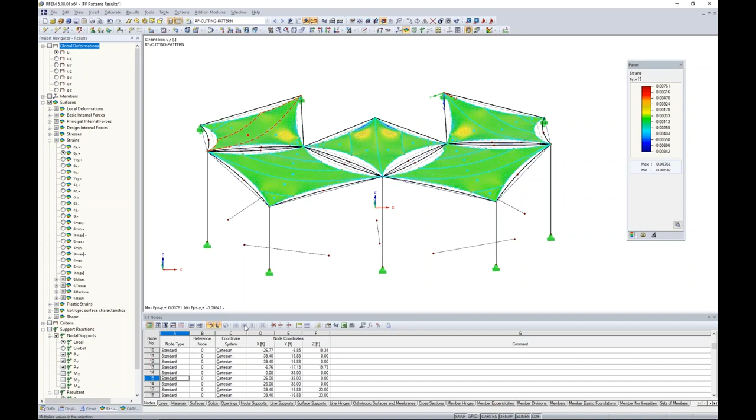So I want to lastly show you guys how to export these files to AutoCAD as well as Revit. So we'll start here with AutoCAD. I can go to File, Export, and I have a cutting pattern tab available to me here. This is where I just tell the program how many patterns I'd like to put in one row, the distance between the patterns, and I click OK. This is going to create a DXF file on your computer. What we can do with that DXF file is open it in AutoCAD.

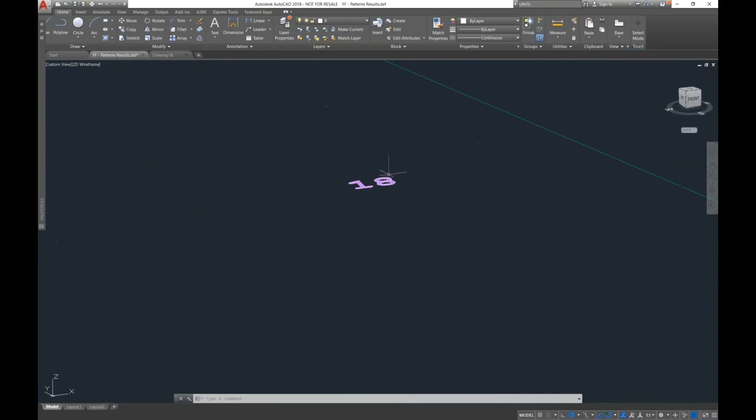And what we will be presented with once we open up that DXF file is, first of all, if I can orient this correctly here, you will be presented with our 3D view of our membrane structure. So these are our fabric membranes. If I zoom in here very, very closely, I see a small number here. This number represents the cutting pattern. Now, of course, we can increase these numbers if we'd like to do so within AutoCAD.

Well, if I scroll over to the 2D flattened patterns and I scroll all the way in, we should see a number available here. So that's nice that we can correspond these 2D flat elements to our 3D surfaces here. Now we can take this and do whatever we'd like with it in terms of printing it out for our manufacturer.

So jumping back then to the RFEM model, what else we can do is to take a look here at one of our load cases. And we'll view only the first load combination here with a 1.6 live load applied. With this, I'm currently viewing the deflected shape, and we'll decrease the deformation factors, and we take a look at our structure here. What we can do with this information is export directly to AutoCAD.

So the first thing I want to do is to make sure here that I have a new file open within AutoCAD, which I do. When I use this direct export to AutoCAD, the program first searches for an AutoCAD license. I want to check this option for the deformed shape. I want to set the units to inches. That's what I currently have set in my AutoCAD, and I click OK.

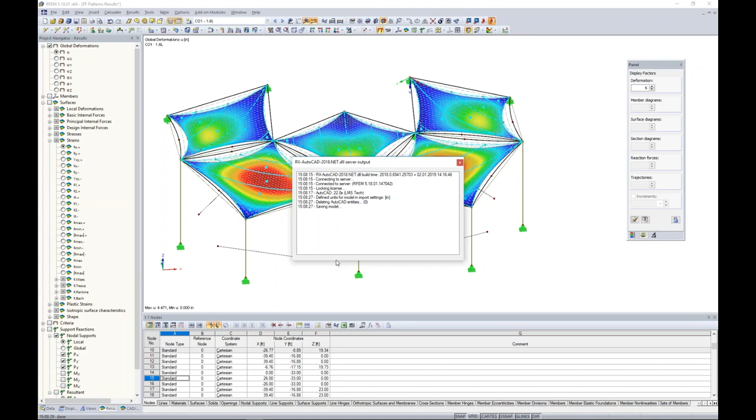Now this is different than creating a DXF file, but rather the program is going to automatically shoot that model into AutoCAD. There we go. Sorry about that. Okay, so we can open it up here in that blank model, and you can see that the structure is automatically shown to us directly within AutoCAD. So that's just the difference here of a direct export versus creating a DXF file. This is my deflected shape of my membrane surfaces under that live load.

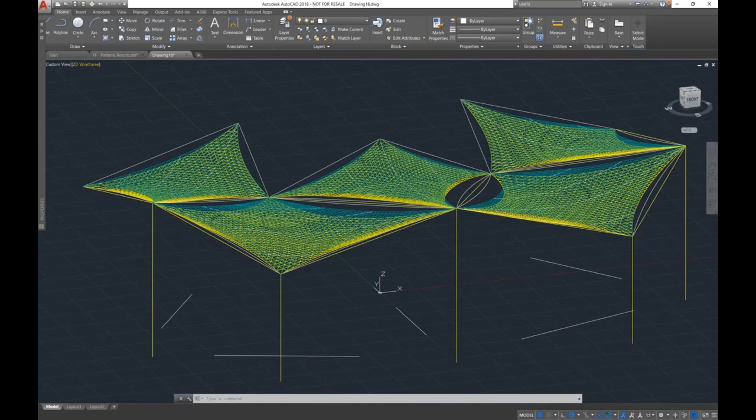So maybe perhaps we can change this to a shaded view here instead. Then under our layers, maybe we want to deactivate the initial form finding mesh shape that was found by the program, not under the live load, and then we can scroll all the way down to the bottom. Maybe we deactivate here the additional line elements. So now we're presented with a nice format for the deflected shape under that live load only of our structure.

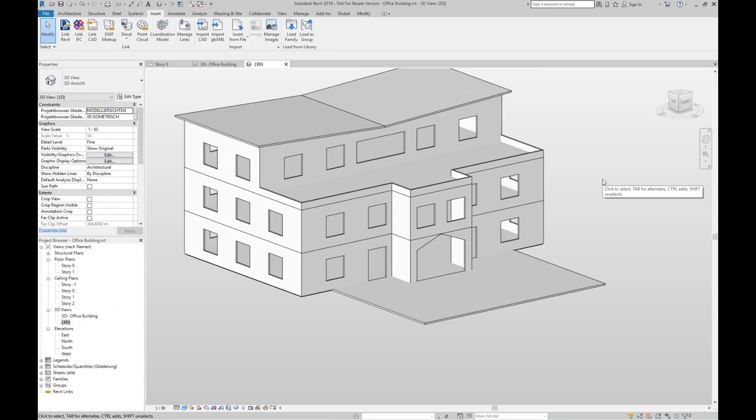So what I can do with this now is go to File, Save As, and I want to save this as a DXF file. So I create my DXF file and I call this one Form Finding REVIT with the DXF file extension. Save that to my computer. Well, now I'm going to jump to REVIT, and you can see here is my office building available to me directly within REVIT. If I'm interested in importing this canopy structure into REVIT, I can do so with this option here called Link CAD.

So the program tells me I have to save my model, no problem, we'll get through that. And then we can select here our Form Finding REVIT file that we just created as a DXF. Now it's important to set here the origin to origin positioning. I click OK, and here is our canopy structure. Now what I do need to do is to select this object here, and we will move it to story 0, and it will shift it up. And now we can see that canopy structure available to us directly within REVIT to add to our drawings and so on. So quite powerful in terms of integrating with the different BIM options as well.

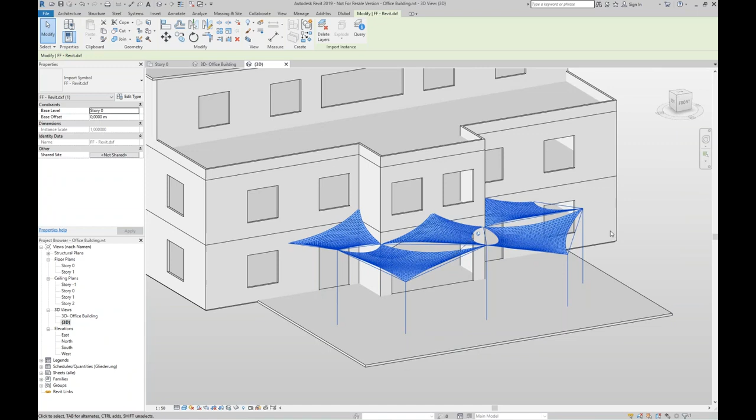So we can jump back to the PowerPoint here and go ahead and conclude today's webinar. As always, I know this is quite a bit of information.